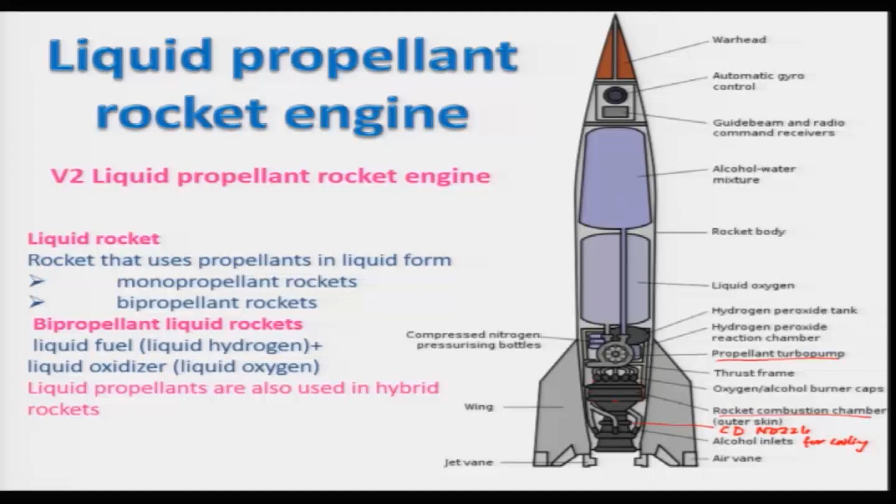Besides this, the propellant system is also used in hybrid rocket engines. Of course, the hybrid rocket engine means a combination of both solid and liquid propellants, and the design for the liquid propellant stream will be similar to that of liquid propellant rocket engines. So, we will now discuss a little more about the various systems we can have in a liquid propellant rocket engine.

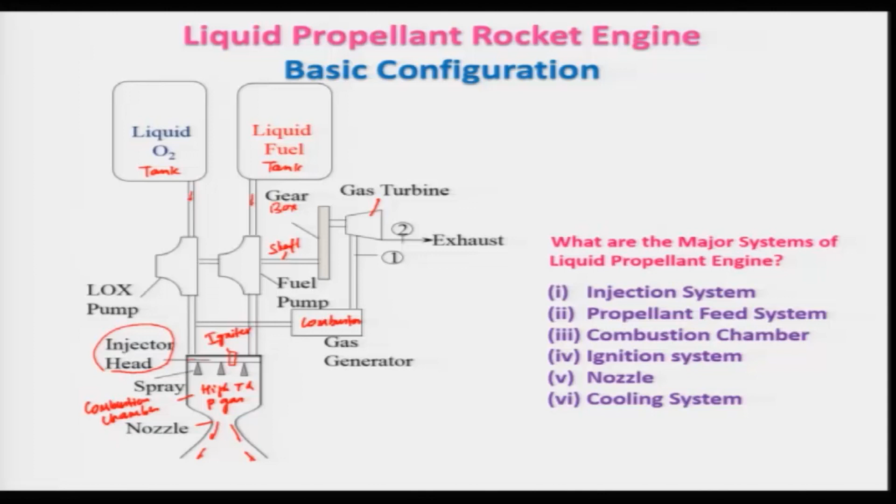Let us look at the types of liquid propellant rocket engine we can have. We have already discussed them at length, but we will recall this classification we learned earlier. Depending on the type of propellant, it can be divided into two categories: hypergolic propellant rocket engines and non-hypergolic propellant rocket engines. In hypergolic propellant engines, as the name indicates, the propellant does not need any ignition energy to initiate the combustion, whereas in the non-hypergolic propellant rocket engine, one has to provide the initial ignition energy so that combustion can be initiated.

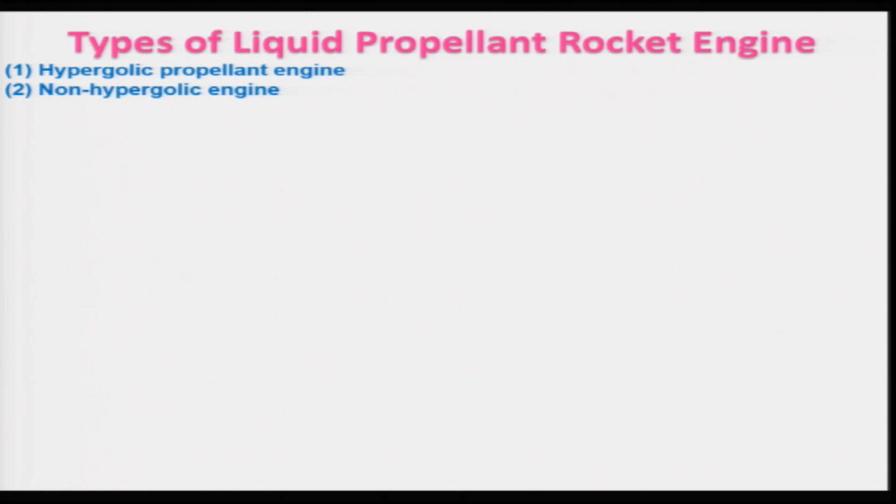Besides this, depending on whether a single or a double propellant is used, we can divide them into mono-propellant rocket engines and bi-propellant rocket engines. Of course, one can go for higher kinds, but generally people use mono-propellant and bi-propellant rocket engines.

In case of monopropellant, a single propellant is used such that it can be decomposed into its constituents whenever it comes in contact with a catalyst or some ignition energy, such that high temperature and pressure gas can be produced easily.

But in case of a bipropellant rocket engine, generally both the fuel and oxidizer liquid propellants are separately injected into the combustion chamber. It can be hypergolic, it can be non-hypergolic. Similarly, a monopropellant can be hypergolic or non-hypergolic.

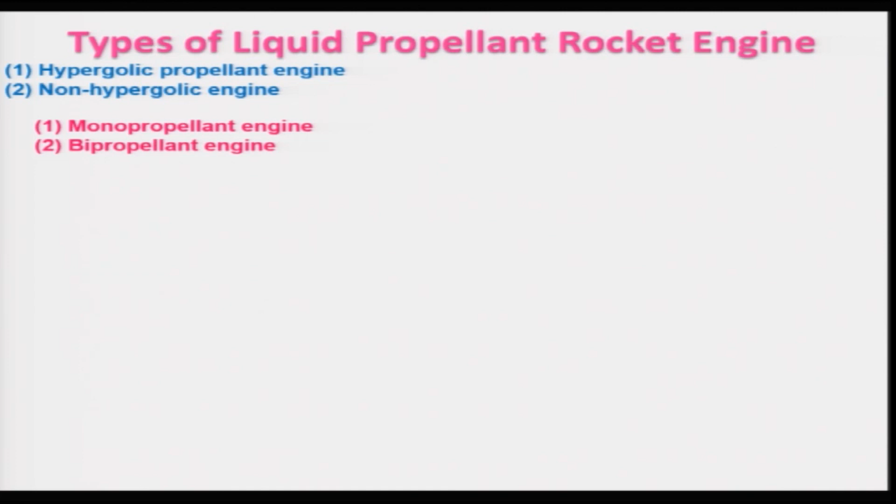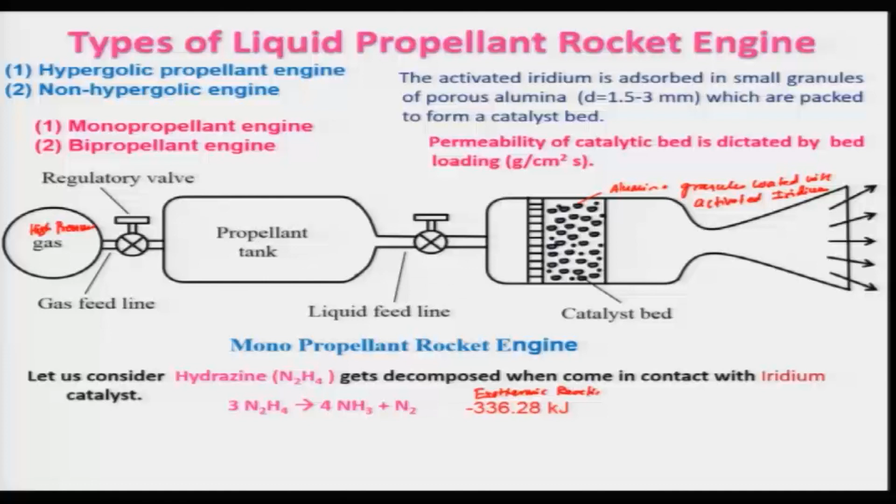So, let us look at hydrazine, which gets decomposed when it comes in contact with the iridium catalyst. It can undergo a reaction where 3 moles of hydrazine decompose into 4 moles of ammonia and 1 mole of nitrogen, and this ammonia is further decomposed into hydrogen and nitrogen. Keep in mind that the first reaction is exothermic in nature, and it is releasing

336.28 kilojoules of energy. But in the second reaction, 4 moles of ammonia decompose into 6 moles of hydrogen and 2 moles of nitrogen. It is an endothermic reaction, absorbing 184.84 kilojoules. You can get an adiabatic temperature of 1700, and when operated at 7 megapascal, it gives a specific impulse of about 245 seconds.

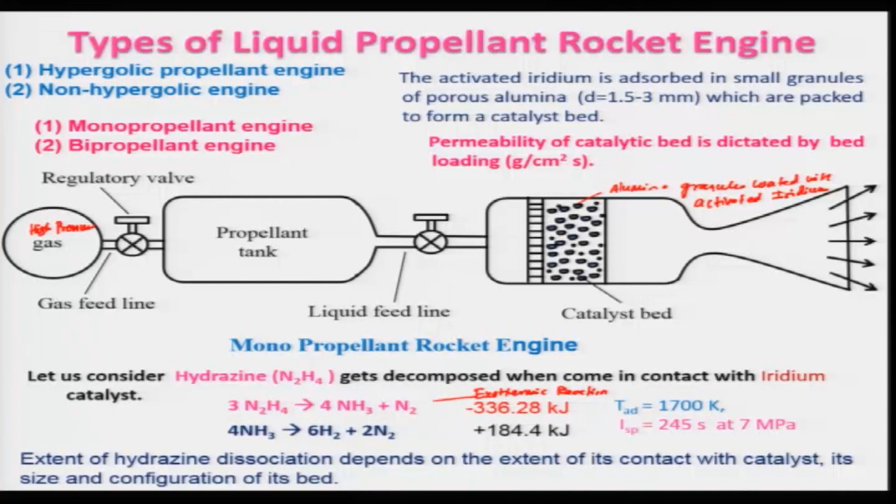As I told earlier, the extent of hydrazine decomposition depends on the extent of its contact with the catalyst, its size, and the configuration of the bed. Therefore, one has to design it properly to maximize the decomposition of hydrazine or any other monopropellant, so that one can get a higher specific impulse and higher efficiency.

So, let us look at bipropellant rocket engines. I have shown a very simplistic schematic diagram, where this is your fuel tank and this is your oxidizer tank, and it is similar to the monopropellant. The only thing is that two lines are there. The fuel is passing through this, this is your pump, and through this control valve it moves over here.

Keep in mind that it goes to the nozzle and acts as a coolant, not only for the CD nozzle, this is your CD nozzle, but also for the thrust chamber or combustion chamber. Then it is converted into spray. Also, the oxidizer passing through here will be injected, and there will be an injector head, which is not shown over here, and this is your injector head.

And depending on the configuration of atomizers, it can have different spray patterns and they can mix. So, the only difference you could see here is that it has a gas generator which will be running this turbine, which is not shown properly, but this is your turbine, and the turbine will be running both pumps, the fuel and oxidizer pump, and there will also be a gearbox in this

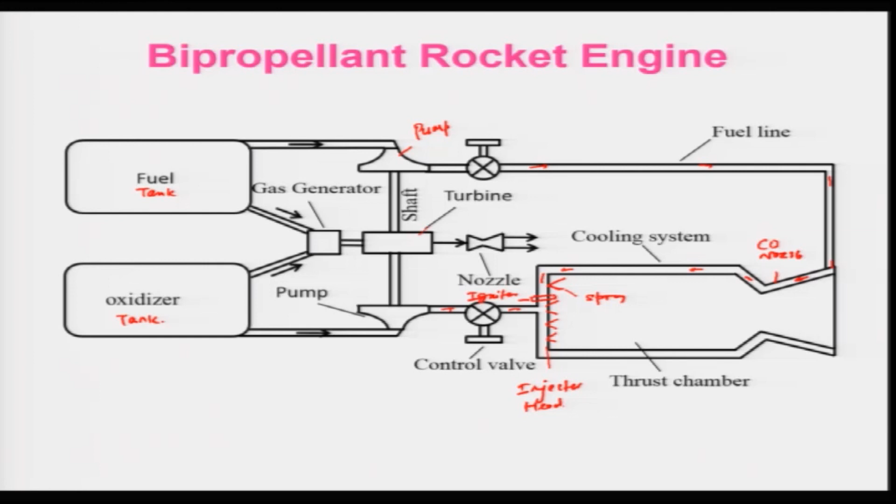which is not shown. So, if you look at it, it comprises all the systems except maybe the ignition system. There might be an igniter over here, and if it is a hypergolic propellant, maybe an ignition system is not required. So, let us look at a cutaway model of an actual liquid propellant rocket engine. It looks to be quite complex in nature.

So, if you start from the top, it has a gimbal mounting, which is used for thrust vectoring, and this is your liquid oxygen elbow, which passes through these flow straighteners, and there is a LOX dome here. And keep in mind that this side is the fuel valve mounting, and then the elbow is here. This is your fuel valve flange, similar to the liquid oxygen one, and it passes through the LOX feed and then the fuel feed line, and this is your injector plate.

This is your injector plate, similar to that injector plate, which has several tiny holes placed in a proper way so that they do not come in contact with each other, however it will convert into spray. And beside this is your pyrotechnic igniter, and this is your electrical lead, and there is also a sealing ring, because you have to seal both the liquid fuel and the oxidizer, and a lot of sealant will be used.

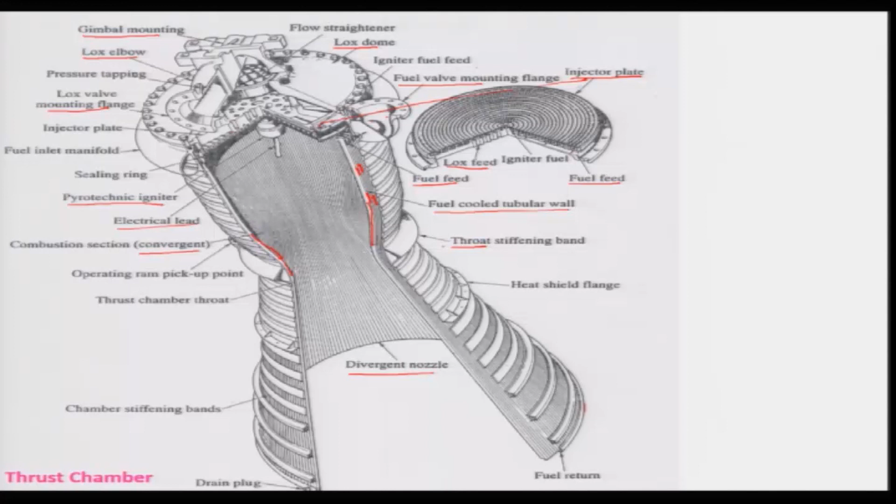If you look, it contains almost all the systems we can recall: the injection system, and of course the propellant feed system is not shown here, it is above it, this is only the thrust chamber and rocket nozzle. It has the ignition system, nozzle, and cooling system. So, this is quite complex, and when you design each component and look at its efficacy, and also assemble them properly and test, it is a

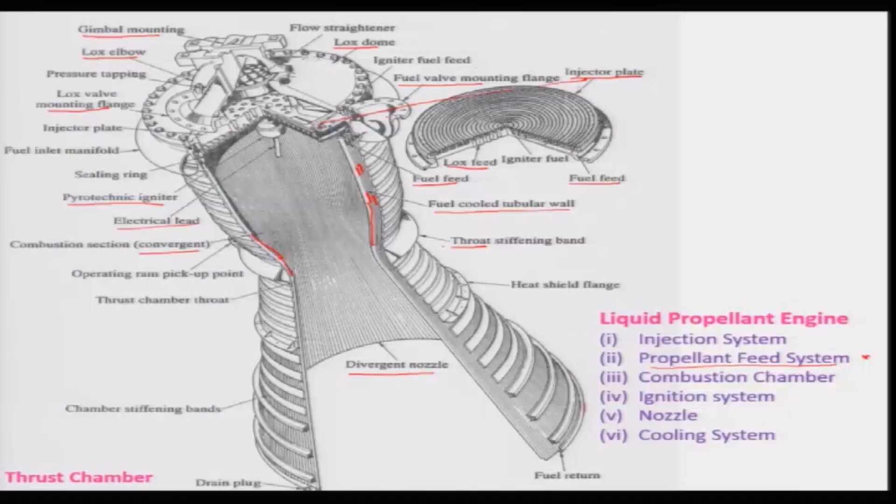Herculean task. And from the engineering point of view, it is quite complex in nature. We may not cover in this course all the design aspects and the fabrication aspects. We will only be looking at the general basic principles.

So, with this I will stop, and in the next lecture we will be discussing more about how we can atomize the liquid propellant such that complete combustion can take place, so that we can improve the combustion.